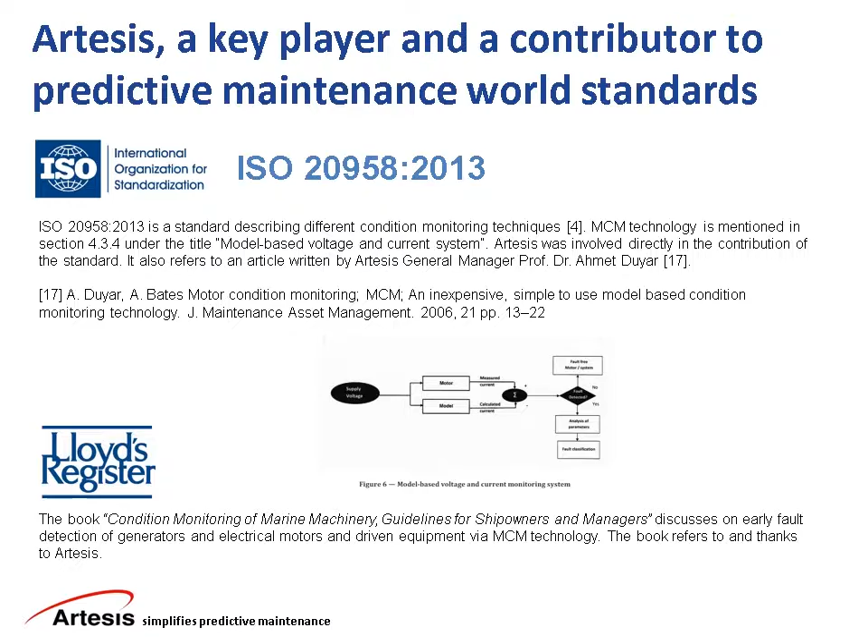The condition monitoring market is experiencing significant recognition due to the era of big data, or industrial internet and IoT concepts. The concept of industrial internet and IoT basically focuses on providing uninterrupted manufacturing and production while minimizing the cost of production. Consequently, reduction of unplanned downtime is at the heart of Industry 4.0 or IoT.

Over the next 7 years, it is expected that 50 billion devices will be communicating through the internet. In the next 20 years, the condition monitoring market is expected to increase 100 times the market we have today. Hence, $10 to $15 trillion of savings is expected over the next 20 years.

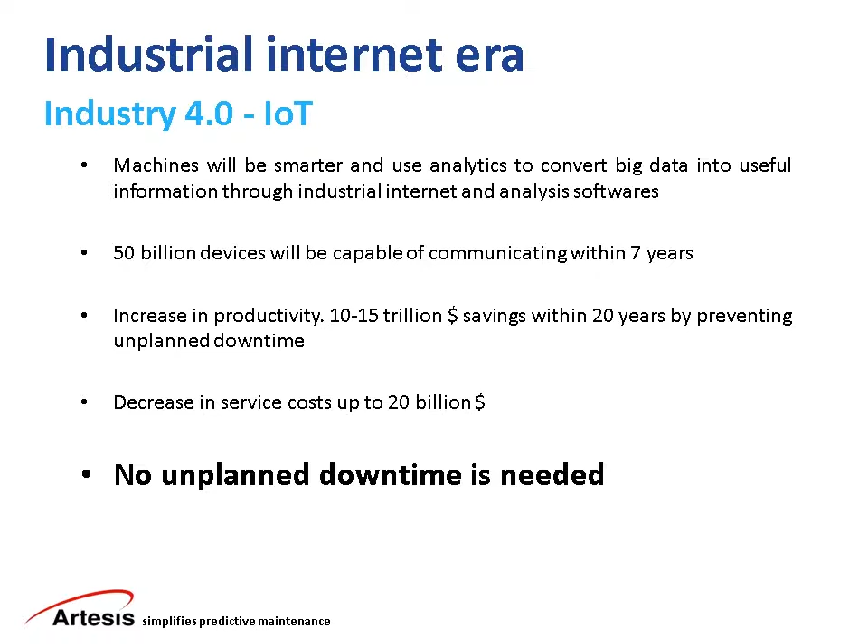The industrial internet and big data make the condition monitoring market a very, very promising market, and at the heart of it is no unplanned downtime, and our products and technology are at the cutting edge, which fits perfectly with this concept of Industry 4.0. Sustainable predictive maintenance, or no unplanned downtime, is very important.

However, according to a study done by PricewaterhouseCoopers, less than 1% of companies are able to implement sustainable predictive maintenance. One very important reason for this is the lack of a monitoring device which provides simple and actionable information so that maintenance people can schedule their maintenance activities without putting any effort into analyzing data. When we look at maintenance people and the way they work, we observe that they really don't have time to analyze the data and come out with the results of the analyses.

Whatever condition monitoring device you have fits the needs of the maintenance people if it can provide information which leads to effortless maintenance action that they can take. So simple and easy to use information provided to the maintenance people becomes very important. This must be actionable information. Comprehensive fault coverage is important.

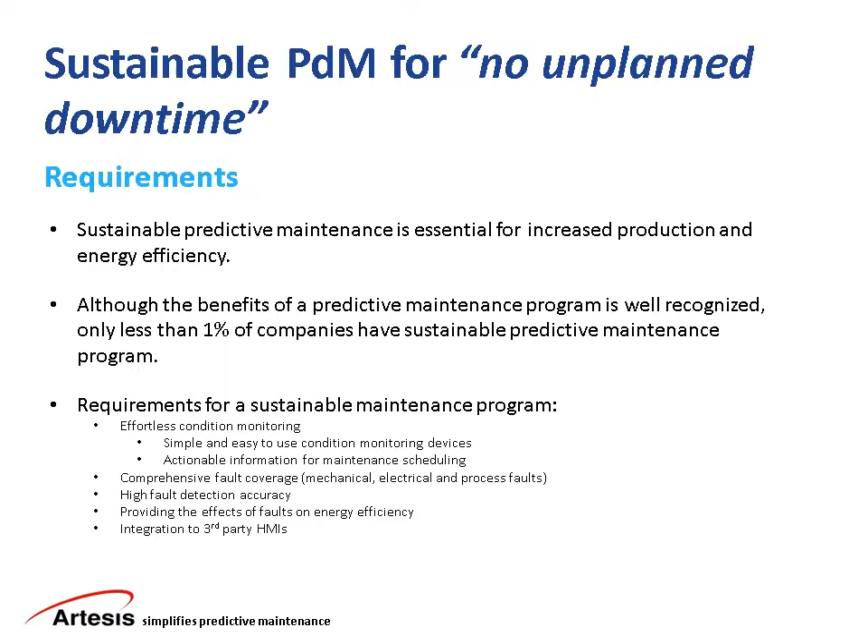Artesis MCM meets all these conditions and is used to monitor electric motor-driven systems as well as electric motors and generators. For example, pumps, compressors, and fans are in this category of electric motor-driven systems.

The energy usage of electric motor-driven systems is also very important, and if they operate under faulty conditions, their energy efficiency is reduced. Consequently, properly operating this equipment, according to the United States Department of Energy, could improve energy efficiency by up to 20%.

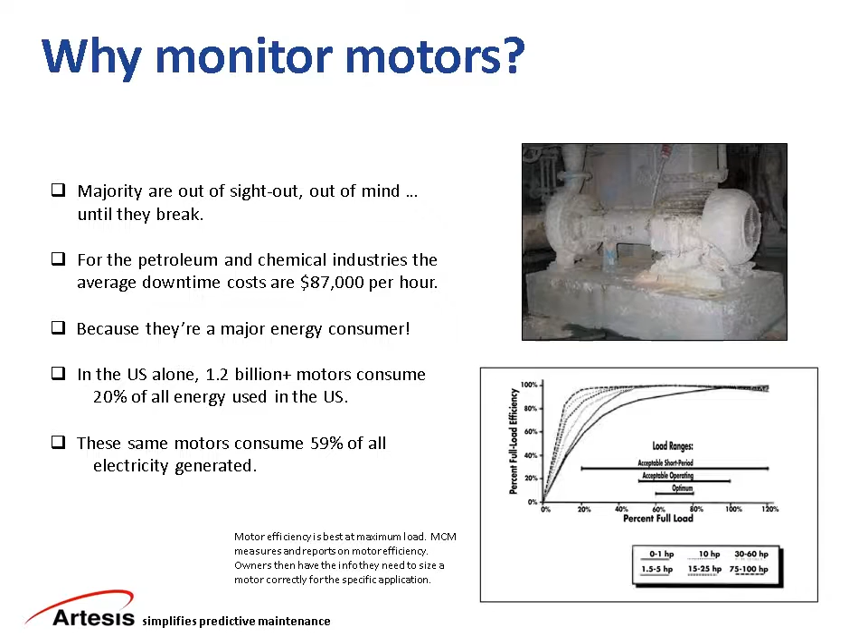Well, in the United States alone, there are 1.2 billion electric motors used in industry. And they use 20% of all energy in the United States, or 59% of electrical energy. Hence, operating an equipment under no fault conditions becomes important, both to eliminate unplanned downtime as well as to improve energy efficiency.

Why monitor motors with MCM? What is the difference between MCM and other technologies, specifically vibration technology? Well, the first and very, very important part is the simplicity of its use and the information it provides so that maintenance people can take the maintenance scheduling action in an effortless manner.

Early warning of fault detection accuracy, in other words, more than 90% of possible faults, electrical, mechanical, as well as process faults are observed by our product, which we call MCM. Comprehensive coverage, workplace safety are among other values that MCM will provide.

As I mentioned earlier, maintenance people don't have time. Hence, whatever information we provide should be so that they can take actions and schedule the maintenance. Hence, even though MCM has one of the most sophisticated technologies, it provides information: what's wrong, what do I have to do, and how soon do I have to do it. These are the information needed by the maintenance people.

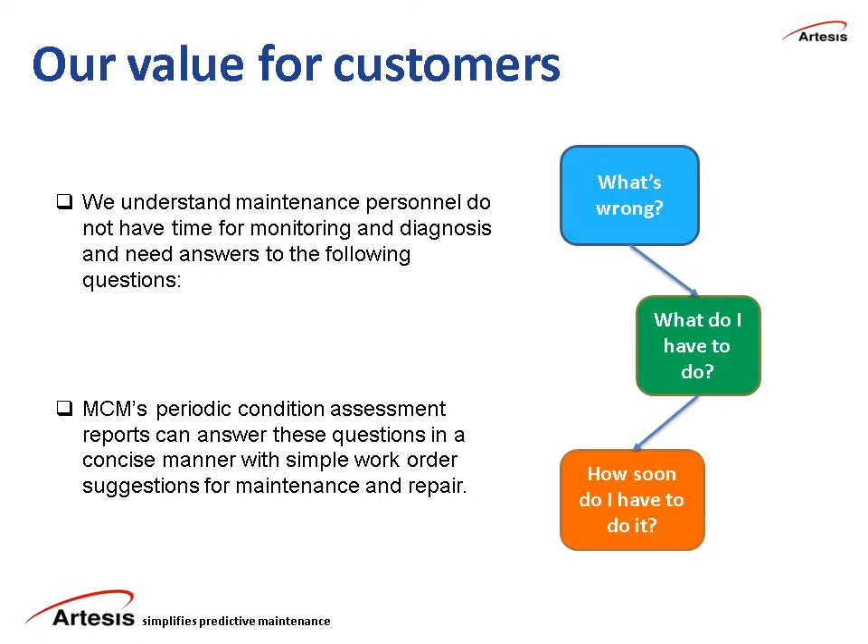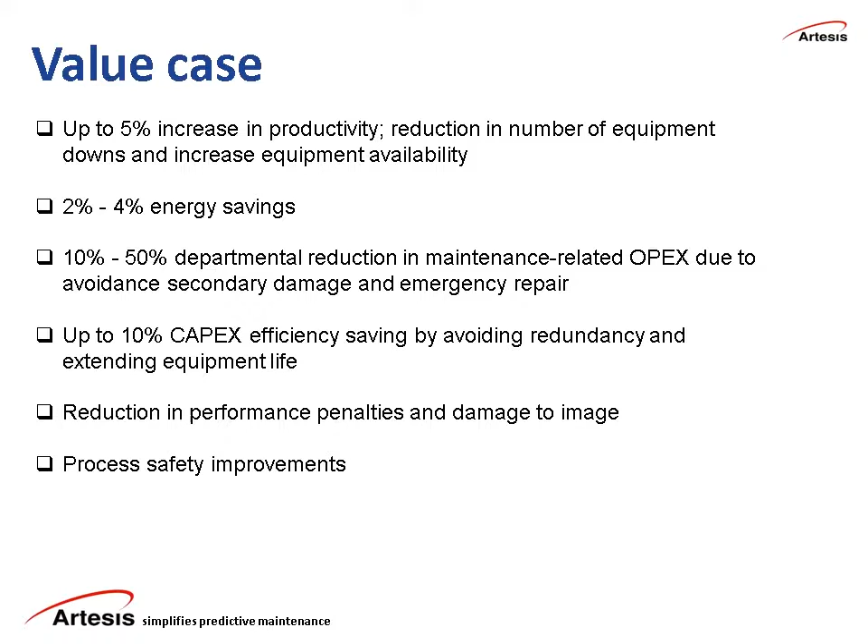The condition monitoring system, in general, can provide value to the industrial facilities, up to 5% increase in productivity. We estimate 2 to 4% energy savings, 10 to 50% reduction in maintenance-related expenses, and it extends the life of an equipment up to 10%, and it can be used by the industrial facility for reducing penalties, performance penalties, or damage to their image.

The return on investment is very important for an industrial facility when they get a condition monitoring product. Our implementation in a mineral processing plant indicates that our return on investment would be 500% per year, or a payback period equivalent to 2.4 months, as you see in the slide.

In an oil refinery plant, just one equipment, a 440 kilowatt compressor, and because of the early warning of MCM, the saving is estimated and calculated by the refinery as €327,000 for providing early warning.

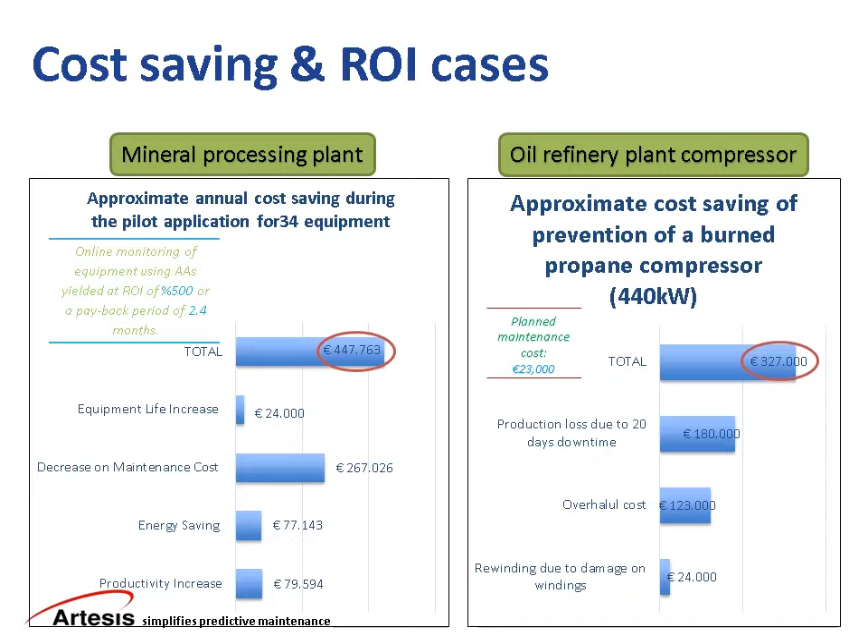These are very important numbers which indicate return on investment, and our MCM and its use in an industrial facility aims to reduce unplanned downtimes by 80% in 1 year. Hence, after implementing it, our target and expectation is to reduce the unplanned downtime by 80%.

Artesis has two products. One of them is called MCM, which does continuous monitoring. It is installed in the control cabinets where the equipment gets its current and voltage. It monitors the equipment all the time, and immediately provides information about pending failures, as well as, if the maintenance action is taken, the effectiveness of the maintenance action is also indicated by MCM.

A portable unit, Artesis AMT, is also available. In less than half an hour, you can do a test on an equipment and observe if there are existing faults in that equipment and get the corrective action. It provides automatic reporting. Both of these devices can be used by an engineer, technician, or foreman. Hence, these equipments are very user-friendly and simple to install, simple to use, simple to act.

MCM measures just voltages and currents, while it provides information about mechanical, electrical, and process faults. The information you get from MCM is very straightforward and simple. Rather than showing complicated graphics, it uses simple bar graphs for diagnostic assessment, and the corrective action that needs to be done is provided as a work order suggestion.

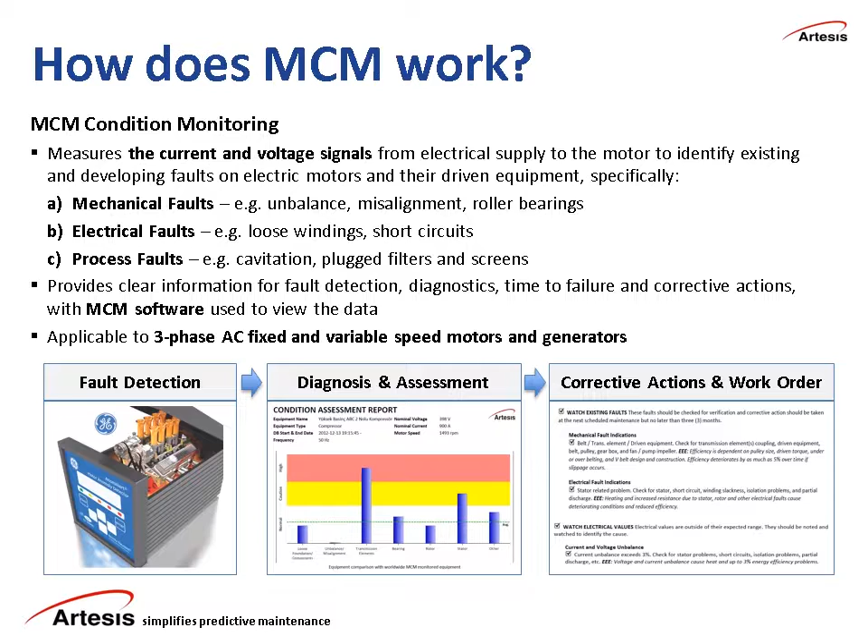This information is provided not only by the graphical user interface we have, but it also sends email to the maintenance people indicating that there is a fault and the time to failure, how long he has in order to make those corrections. The technology we use for MCM is actually based on comparing expectations with what actually happens.

For example, you do this in your everyday life. We call this model-based fault detection. In your everyday life, when you get up in the morning, you get into your car, press the gas pedal. If the car doesn't accelerate as you expect, since you know how hard or how soft you press the gas pedal, you would say that something is wrong.

You know this because of two reasons. One of them is you have a model in your mind. If you press the gas pedal hard or soft, you know how the car should react. We call this model-based fault detection. The other is you learned the system before in the past. Hence, its behavior does not match with your expectation that you have seen in the past. MCM also works in a similar manner.

The continuous monitoring product we have learns the system for about 10 days: during the rush hours, in the evenings, in the mornings, during the weekends. Hence, it learns all the external and internal mechanisms that the electric motor-driven machinery like a pump or compressor is experiencing. And at the end of the learn period, if the equipment already has a fault, it indicates that fault.

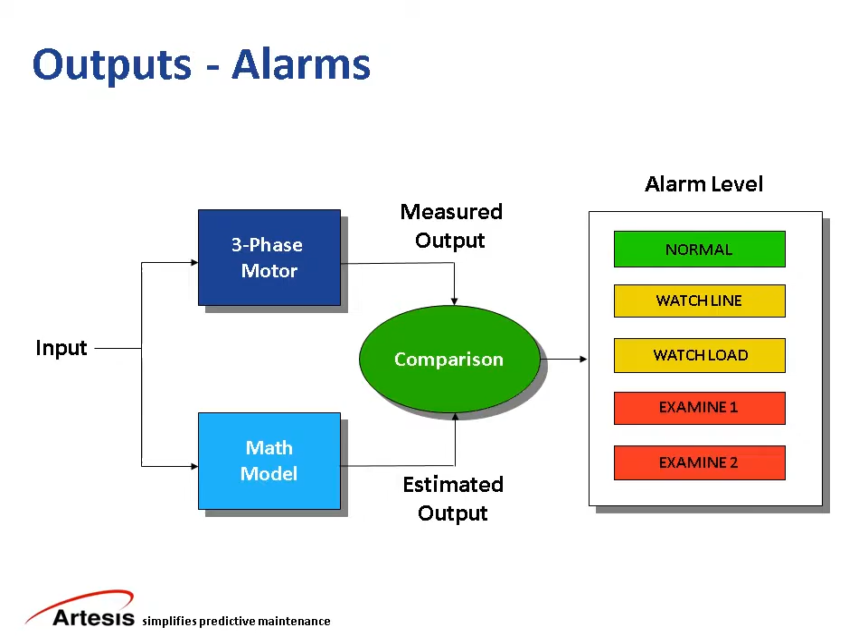The installation of MCM is very simple. It is installed on the control panel. It uses inexpensive and simple current transformers to obtain voltage and current values. We get three-phase voltages and three-phase currents at 2,500 Hertz, which means that we have 2,500 data from each channel every second. As a total, we get 90,000 data.

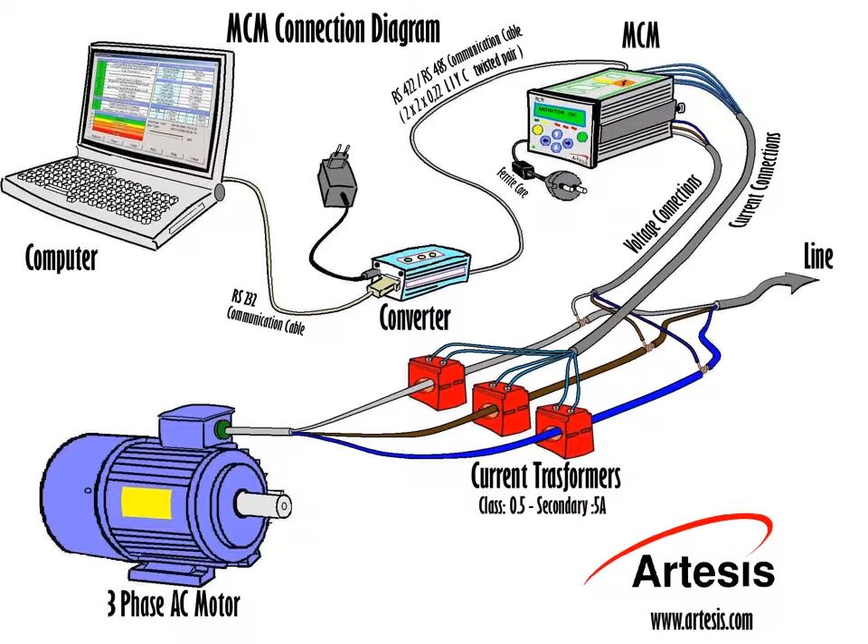We evaluate this using our algorithm and provide condensed information to the user, which is basically if everything is okay, or if there's a problem, what's wrong, how much time they have, and what should they do. For system integration, MCM can be used with existing SCADA systems or computerized maintenance management software.

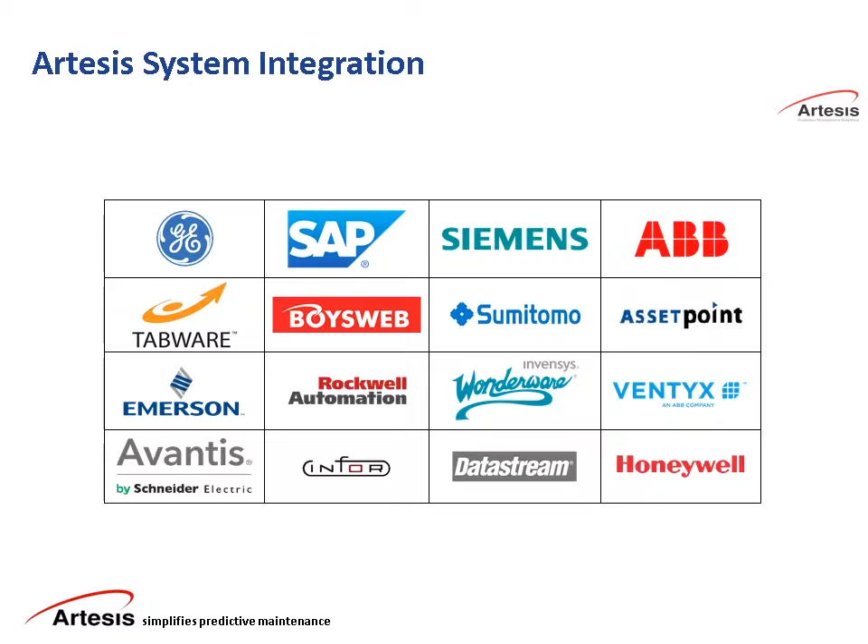The MCM is connected to a computer, and normally it is monitored by maintenance people, and maintenance people get this information about what's wrong, how much time they have, and what should be the corrective action they should take. If needed, very simple information is also provided to the operator, and the operator knows that something may be going wrong. Maintenance people and operator together talk and decide on when to schedule maintenance so that their productivity and production will be optimized.

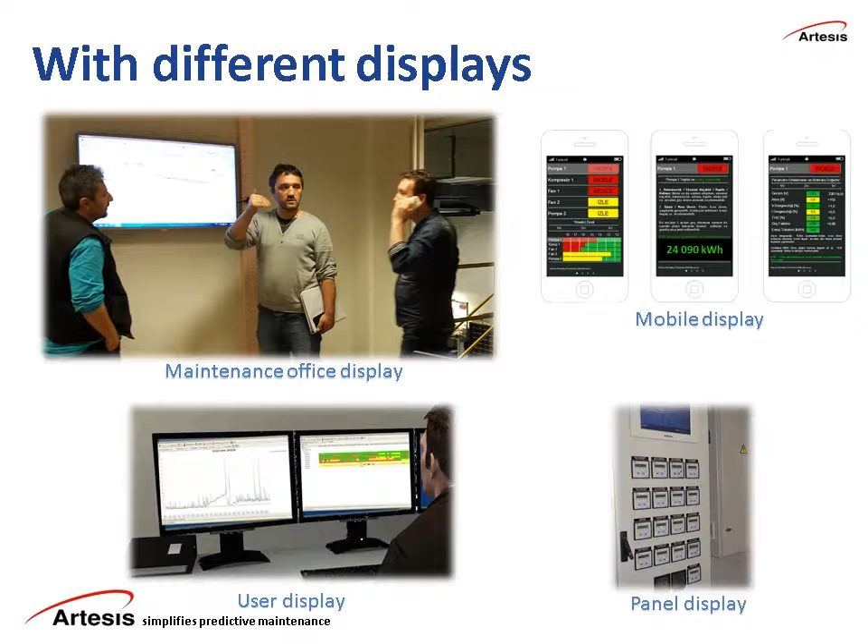We also have mobile phones that you can use in order to monitor, in addition to using the graphical user interface we have in the computer. The whole system can be monitored by using mobile phones, or the graphical user interface can be provided on a TV screen, and the TV screen can be put in an area where the maintenance people come and go.

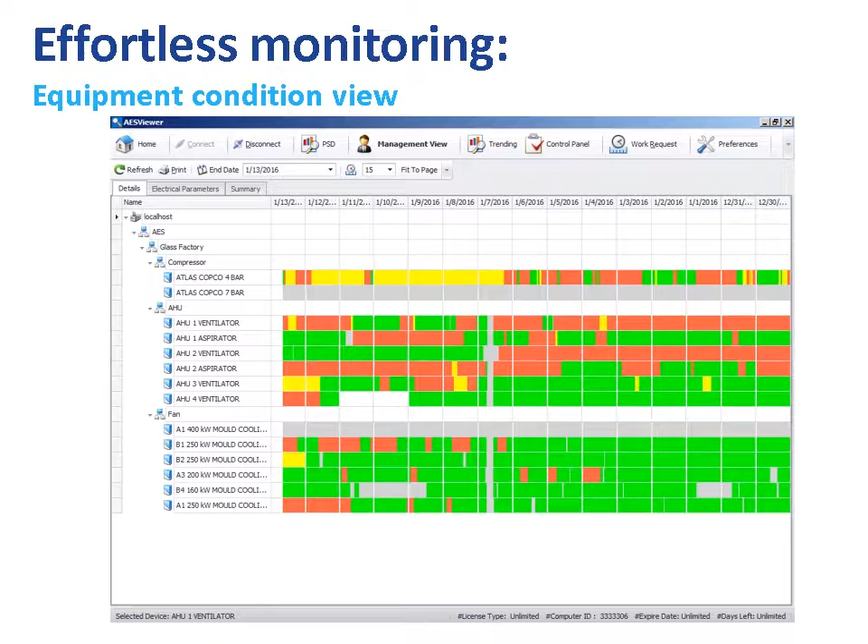Our graphical user interface basically has several diagnostic pages, but of the first three, one of them is very important. The first one shows you, using traffic lights, green, yellow, and red, the condition of all the equipment you are monitoring in your facility. And if you see that one of the equipment shows consistently red color for a certain duration, then you should go ahead and make the scheduled maintenance for that.

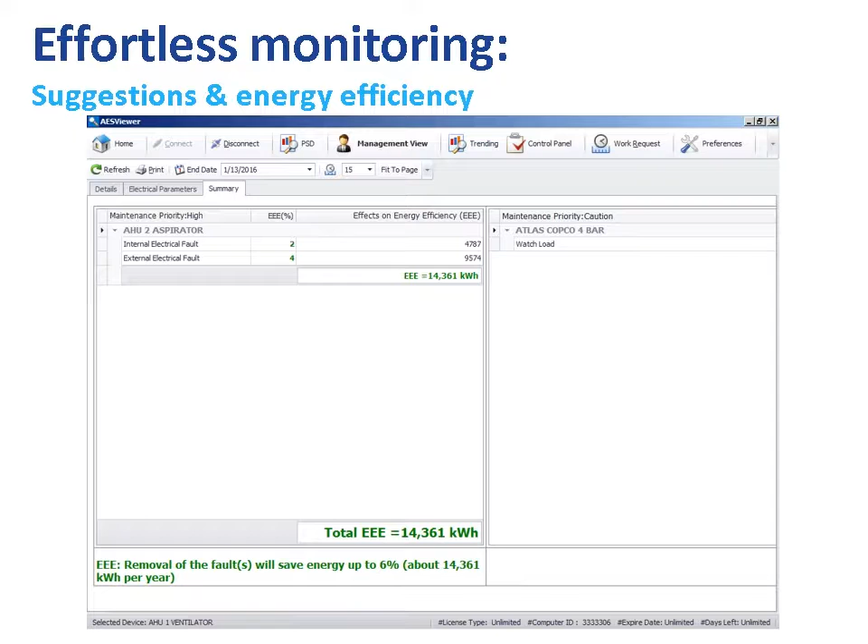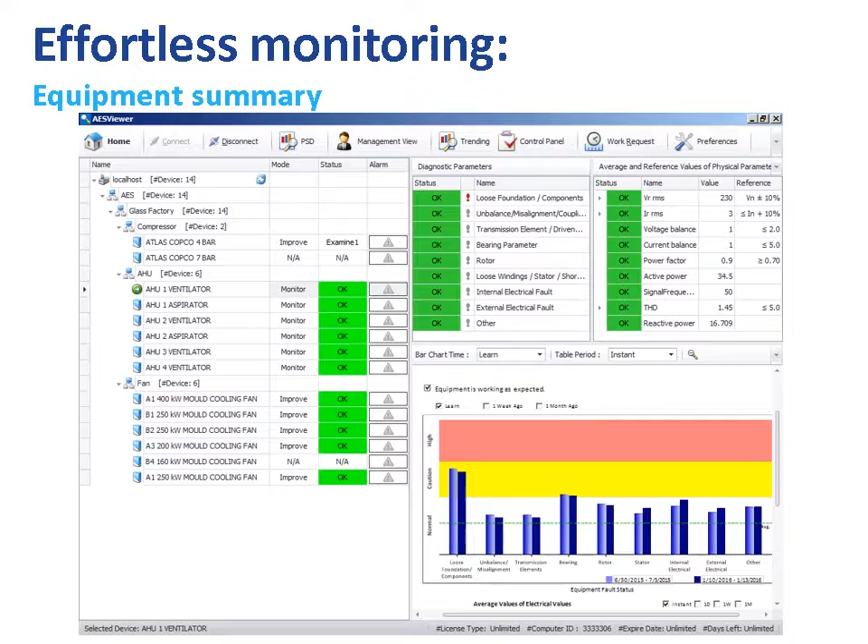Actually, the graphical user interface also provides you information about what's wrong, what components should be taken into account, and if you make the corrective action, the energy savings that you will get. Hence, it is perfectly suitable for effortless monitoring. If you want to make detailed analyses for advanced users, it gives spectral analysis capabilities as well as trending capabilities.

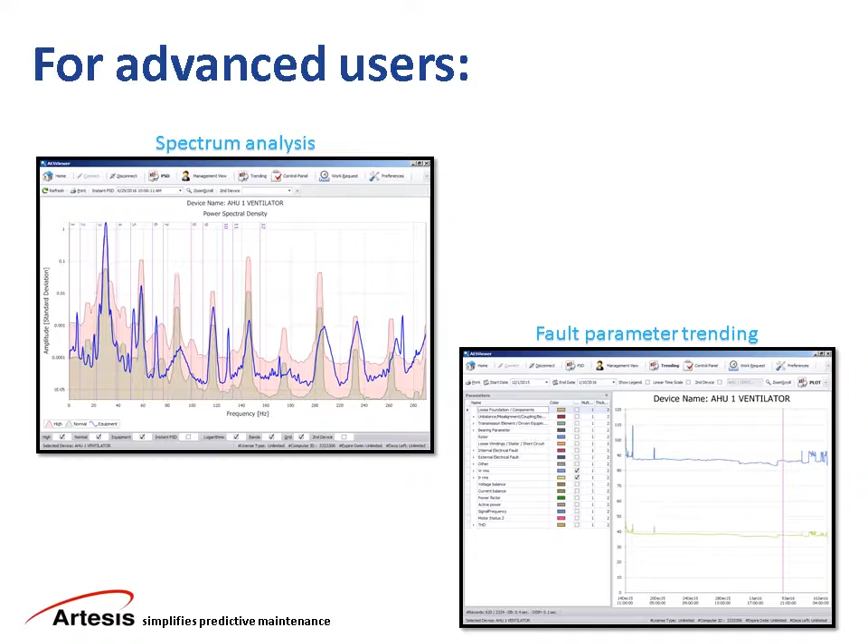Our technology has been used by some internationally well-known customers. For example, in the United Kingdom, almost all the water industry has our product. In pharmaceuticals, Pfizer, Novartis, 3M, Merck are using our technology. In food and beverage, Unilever, Mars, Coca-Cola are among our customers. In automotive also, Renault, Fiat, Ford, and Maxion, their suppliers are also our customers.

In the United Kingdom, in the North Sea, our products are used by oil and gas companies, especially in petroleum platforms, and in the iron and steel industry. But the one I am very proud of and is very important is in transportation. It's also used in ships, both military ships as well as commercial ships.

I am very excited about the fact that both the US Navy and Royal Navy use our products to monitor their generators as well as pumps which are used for cooling of their guns. These are important because the United States Navy puts only the best products in their ships, and our products meet all the standards that you could meet in the world.